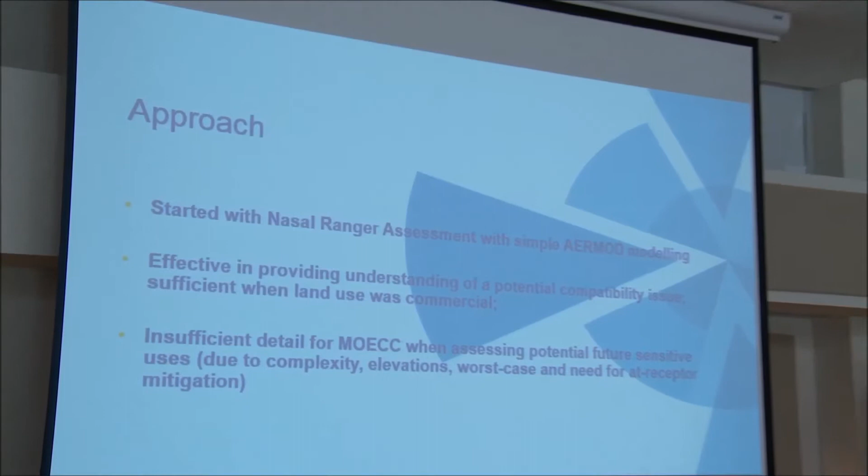So we initially started using a very simple approach with the nasal ranger. It's a complex facility, lots of sources. We looked at some back calculations from the nasal ranger, saying well, it's coming off this volume source, it's coming off these different processes. We did some back calculations, got some ideas as to what the emissions would be, and used that a little bit for some initial assessment.

The problem was it didn't really have enough detail. We couldn't tell from the nasal ranger what the specific sources were. When we then started to try and model, for example, an elevated condo complex right next to the facility, the nasal ranger was giving us back calculations from somebody standing on the street, but not up at 50 meters or 100 meters above the building. So we had a real tough time trying to predict levels higher up and as we went out. As much as the nasal ranger gave us some initial information and ideas, it really wasn't the answer to what we needed.

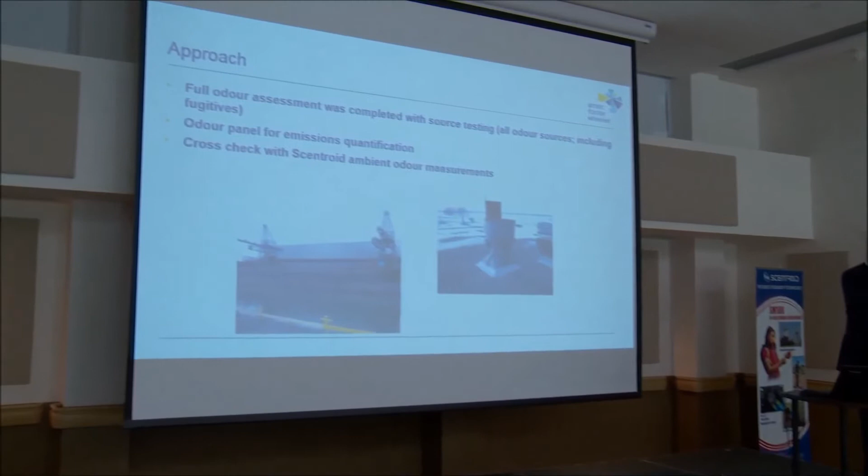Not surprising, like a lot of you have done, we went out and did some measurements, sent our stack sampling crew out. We measured a fair number of sources, about 60 I think in total. A lot of odor assessment, a lot of monitoring being done. Odor panel testing, triplicate on most of these sources. Some of them we had to do 2 or 3 times, not because we weren't comfortable with the results, but they varied by season.

We also found that some of the ship loads, we also measured the odors coming off ships when they were opened up. The sugar cane ferments inside the ship. Different sources of sugar cane had different odor characteristics as they came to the site. So we had a lot of variables we had to deal with.

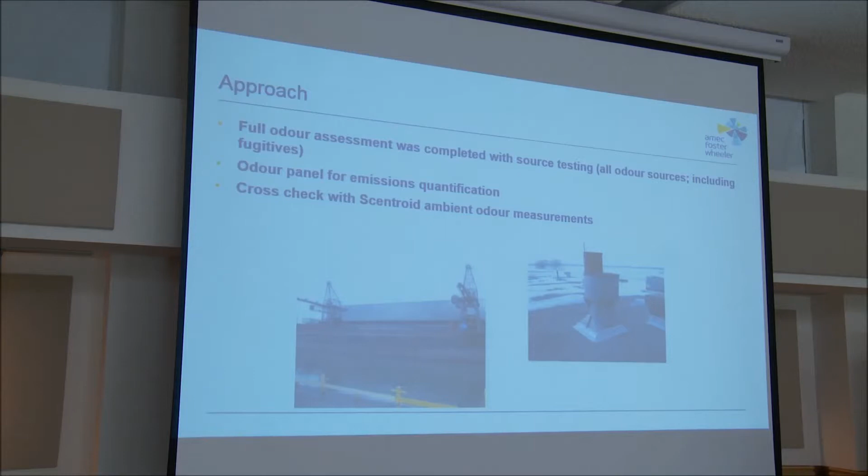We took that, did our usual, plugged it all into AERMOD, ran numbers. We used the Scentroid to do a little bit of cross-checking. We tried to get that out every time we were doing odor testing, so we had a good match. Worked relatively well, factor of 2 to 3. That's about reasonable for what we were looking for, and we were certainly getting that kind of confirmation.

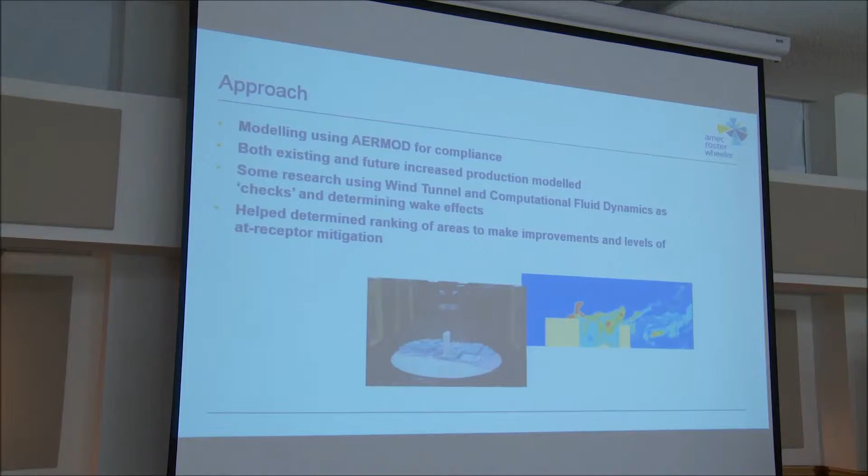We also looked at a couple of other issues. You're starting to get into some fairly complex geometries when you're talking about condos going up around the building. It's downtown Toronto, it's not exactly a flat plane. So we also had some fluid dynamics work done to see whether we had to worry about odors on the backside of buildings and how much would we get as a reduction there. Did we need to worry about as much as we did on the exposed faces of the buildings?

And sure enough, with some testing and some work we did, it looked like we would get about a factor of 3 or 4 reduction on the backside. All very helpful to know in terms of how you're going to develop things.

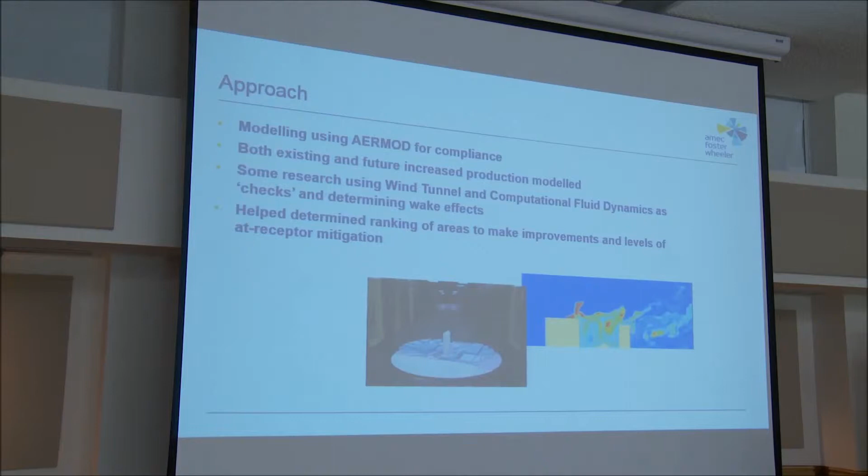I reiterate here, keep in mind we had a nice situation. These were developers coming to Redpath saying we want to build near you, so they were being very cooperative in terms of their designs and layouts. We had a lot of input into this. It would be much more difficult, almost impossible, if you had existing development already there and tried to retrofit something where you've already got an issue.

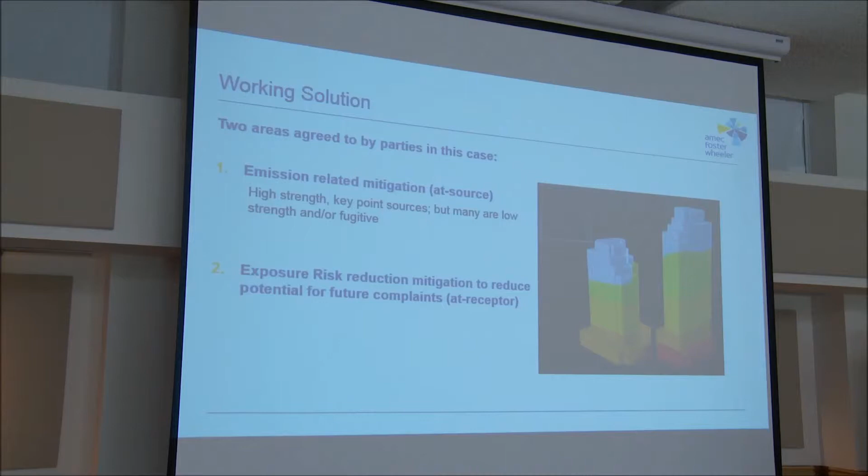So I want to focus the next 5 minutes or so not so much on the at-source control, though we did look at that. We assessed a number of sources, and some were controlled. Redpath basically redesigned their process, changing one step to eliminate an odor source that was about 40-50% of their total odor emissions. Very useful thing to do.

But we also sat down with the developers to discuss what we can do to minimize the exposure risk. Keep in mind, we're dealing with odor, so we're dealing with nuisance complaints. So what are people going to be exposed to became the question. Effectively, the constant question was, what can we do to minimize somebody complaining that they're smelling an odor, if they smell an odor?

One thing we quickly realized for any development in that area was that if you start smelling odors from a facility inside your condo, that's going to lead to complaints. If you're inside your condo 24 hours a day, any time of day or night, and you start smelling an odor, you're likely to complain. So one of the at-receptor mitigations required in all the buildings going in around Redpath is a proper ventilation system within the unit to allow for odor filtration, so the units themselves have minimal odor - in fact, clean air all the time, or at least clean outdoor air.

We looked at some of the closer developments - could we work with the developer to provide buffer buildings in between? By buffer buildings I mean non-residential, non-sensitive use buildings - commercial buildings, office buildings that have sealed windows. Again, with the intent that if you've got a sealed window, it's less likely you'll get odor inside the building. We also require odor filtration on those buildings, again trying to minimize complaints and where people will have complaints.

If you start thinking that through in terms of other things you can look at, we also looked at a couple of other areas - what else can we do to change people's behavior?

One of the things we looked at was on some of the more exposed faces, small balconies. If you have a large 5-meter by 5-meter balcony where you can put all sorts of outdoor furniture, you're more likely to expect to sit out on that 25 square meter balcony and not smell something. If you've got one of those smaller apartment balconies that's just barely wide enough for 2 chairs side by side, and even then you're a little uncomfortable, people won't be outside as much - reducing the potential for people being outside with expectations of smelling.

We also requested some buildings put in self-closing doors - in other words, don't have patios or balconies where you can open up the whole glass wall and suddenly the entire outside is inside. First, the ventilation systems we're talking about won't work when you do that. Second, there'll be an expectation that when those windows and doors are wide open, you're going to have odor-free air. So on some units, we've got doors with self-closers on them, so that once they're open, you have to work hard to keep them jammed open.

The other thing we requested in the design - and I'm sure you've all experienced this - if you see it, you're more likely to complain about it. So with a lot of the open outdoor amenity spaces, rooftop patios, common spaces, we said if you're going to put those in, that's fine, but let's put some barriers up so you're not looking right out at the fan on top of the Redpath building roof.

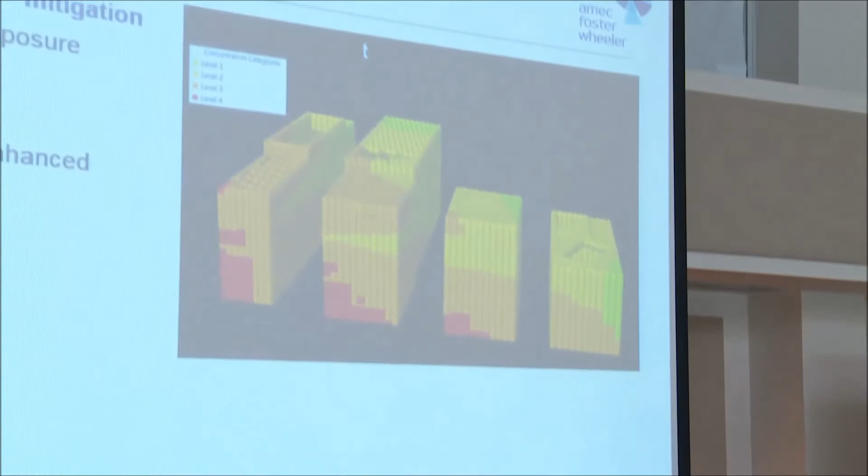One of the things we ended up doing when you start doing all this is we needed to look at certain levels - where did we want these avoidance mitigation protocols to apply. I can't give you exact numbers because those are under confidentiality agreements with the various developers. We basically looked at existing exposures, what was being done for existing at-receptor mitigation, small balconies, etc., for some of the ones further off. We looked at that, reduced it a bit, and said, okay, where do we need to put what. These different shaded areas on these drawings, or these three-dimensional representations, level 1 to 4, you can't read that from back there, but it defines in agreement with the developer what they will do for at-receptor mitigation at those various locations.

Just basically, there it goes. Almost there. I think you're good, Alex. I think I can get through the last two slides.

One of the challenges is always how do we deal with modeling numbers, odor predictions, to try and avoid, as a surrogate for avoiding future annoyance. It's a fool's game - it's a difficult thing to do. At best we've tried to tie things down as best as we can for Redpath in terms of future development in that area. There really was no way of getting regulatory certainty on this. Think about going to the MOE or any regulator and saying, look, we're going to do this, guarantee us we will not have a problem in the future - that's not going to happen either. So the best we could do is try to negotiate this as best we could.

The other key issue here is, and I won't say it's a unique situation, but a good situation in the fact that we had development coming into the area. They needed a land use change to proceed. That gave us an opportunity to sit and negotiate some fairly solid contracts and agreements with the developer, which will then pass on to the condo owners and the condo development from there. So not all mitigation has to be at source.